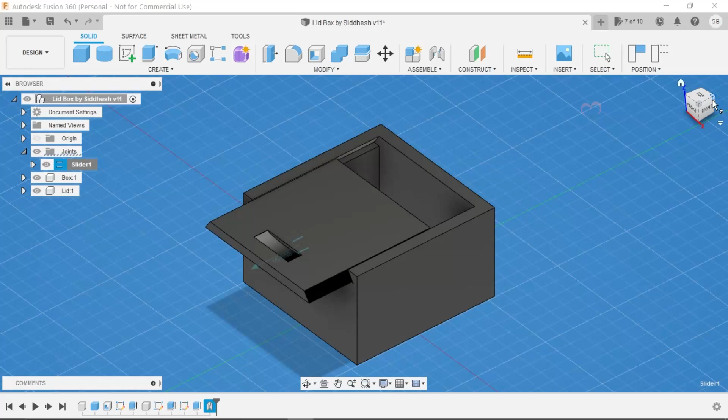Let's take a glance at the way to produce this 3D printable box with the sliding lid.

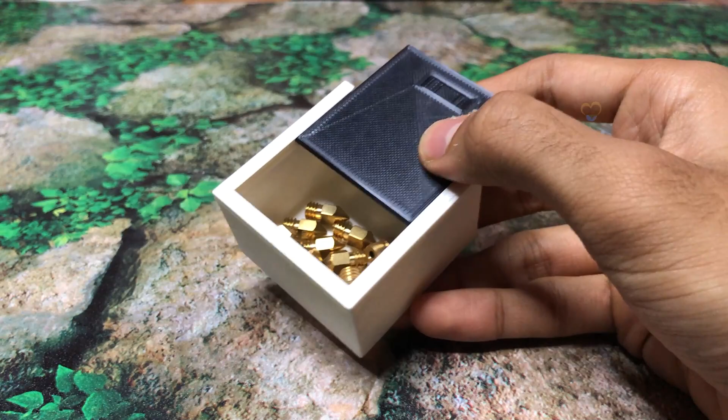In this episode, I will show you how to design a 3D printable box in Fusion 360. This box with a simple sliding lid will serve as the perfect storage container for a variety of objects with user parameters. You can simply change the size to suit a deck of cards, SD cards, and store any objects you want.

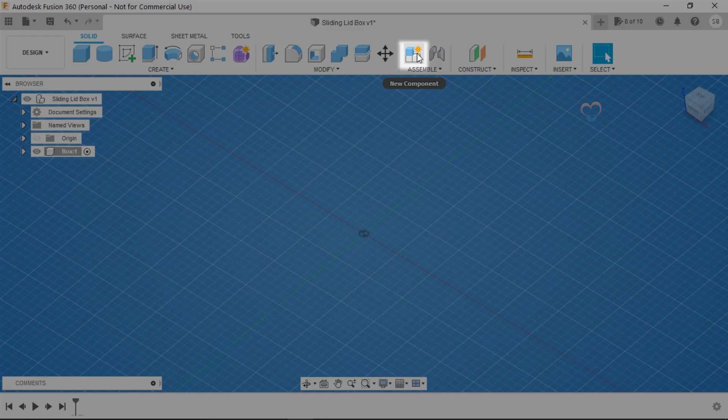To create the box, make sure the Design tab is enabled. Click on New Component and name it Box. Again click on New Component and name it Lid. Now look closely - the box component is selected as a parent category. Make sure to close this and select your project name as the main or parent category. Now make sure to select the box component.

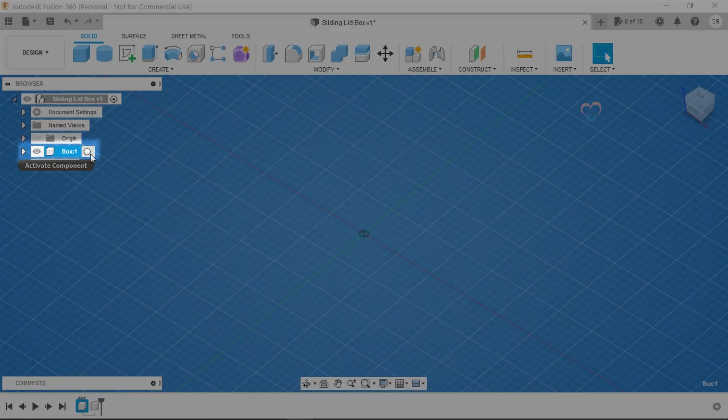Click on the box command and start sketching on the XY origin. Press tab and make a length of 50 mm, width 50 mm, and height 50 mm, then click OK.

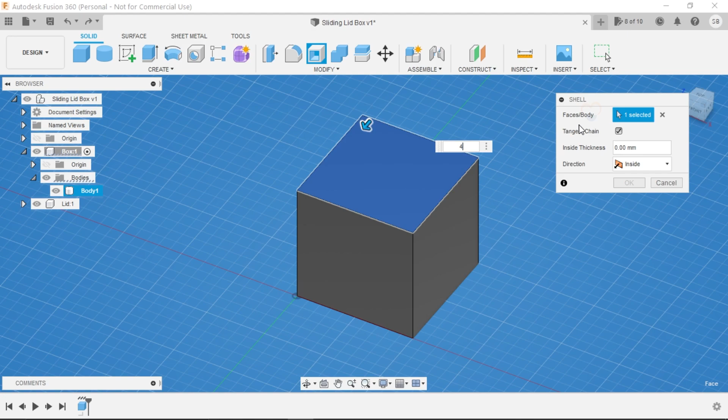To make the box hollow, click on the upper face of the box and click on the Shell command from the panel. Then make the thickness 4 mm and click OK. The wall thickness of the hollow box is 4 mm from all sides.

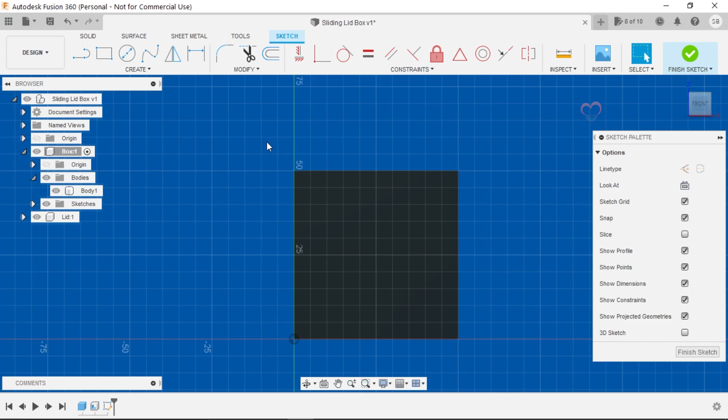Now right click on the front face of the box and click Create Sketch. We have to project the outer edges. For that, click on Create, and in the drop down list find Project or Include. Select Project, click on the front face of the box, and click OK.

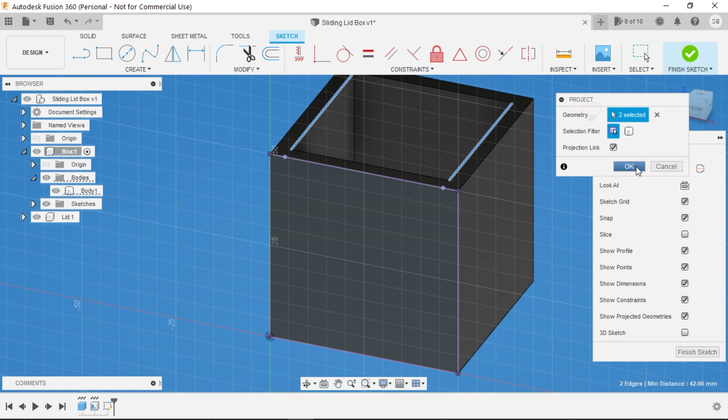Right click on the screen and again click Repeat Project. Now select the inner two edges as shown in the video and click OK. Now you can see all points are visible.

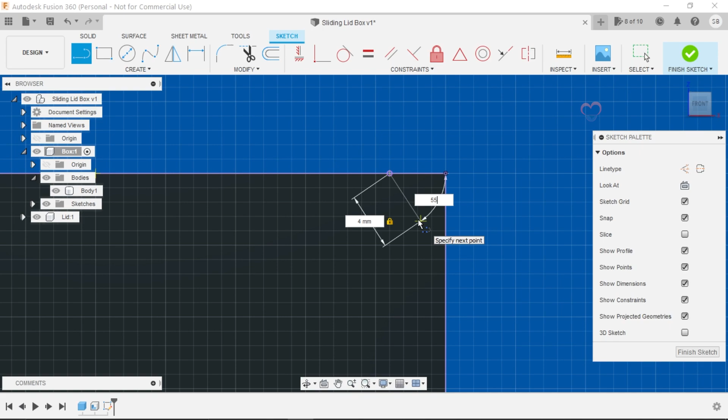Click on the Line command from the panel. Select that point and drag the line 4 mm, press tab and type 55 degrees. The line is now matching the point.

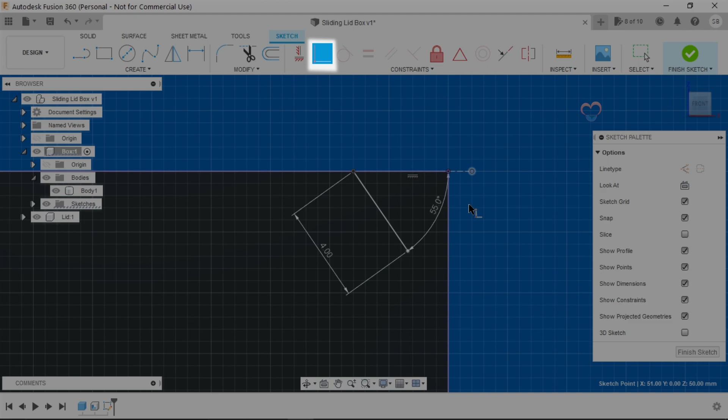You'll notice we have a point in the upper right that is not constrained, caused by our angle dimension. We can select the point and the corner, then add a coincident constraint to take care of this. Now let's click on the line tool to produce a line running directly down the center.

As you can see, the triangle appears in the center. Now click and drag down, then click Escape to clear all commands.

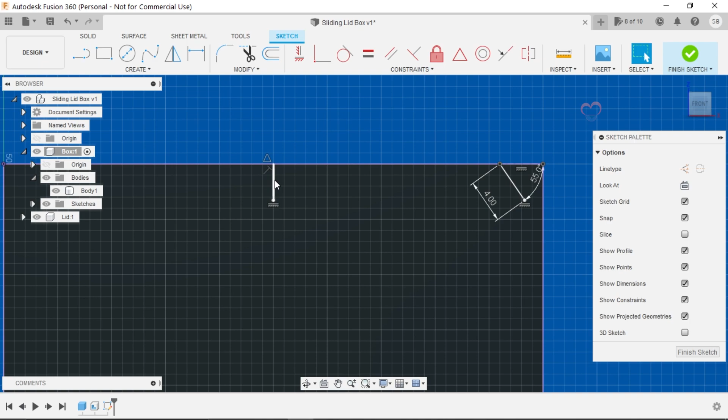Select these 2 points and click on Horizontal Constraint command so it will remain at the same height. Select the middle line and turn it into a construction line. Now click the line tool again and connect these 2 points.

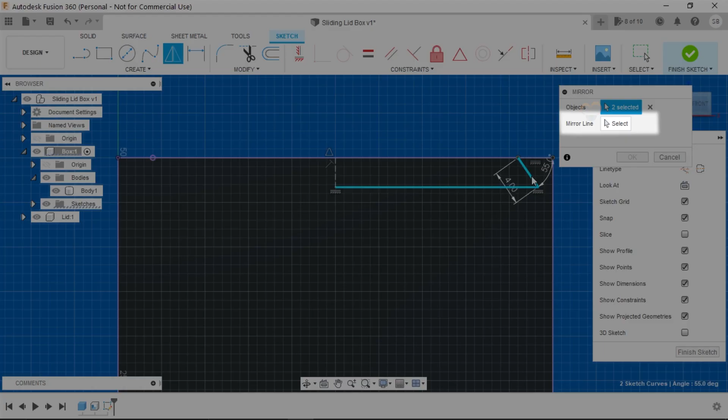Click on the Mirror command from the panel. We select these 2 lines as the object to mirror, and for the mirror line we choose our construction line, then click OK.

Click on Finish Sketch. To cut away this slot, we can use the Extrude command. Select that part and click on the Extrude command.

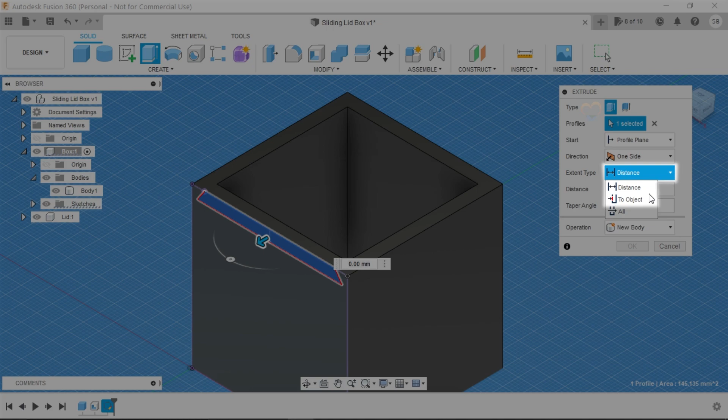Select the To Object option. Now select the rear face of the box and hit OK. You'll see that we have a nice ridge for the lid to rest on.

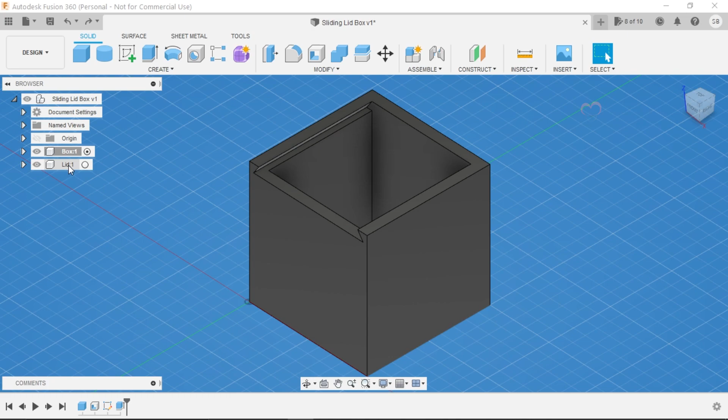Now we are ready to make the sliding lid for the box. For that, select the lid component. Right click on the front face of the box and click Create Sketch.

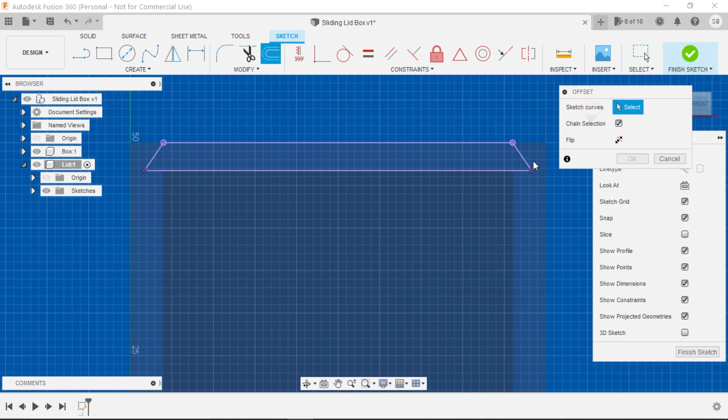Now activate the Project command and select these 4 edges, then click OK. Select the Offset command from the panel and select these 5 edges as shown in the video, making the offset position 0.25 mm, and click OK.

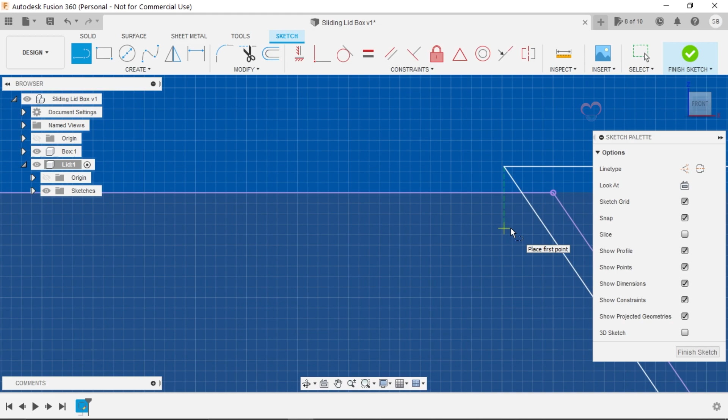I found that worked well for my printer. Select the line tool and click on the inner line that is offset, then drag to the other point. Click and join the point as shown in the video.

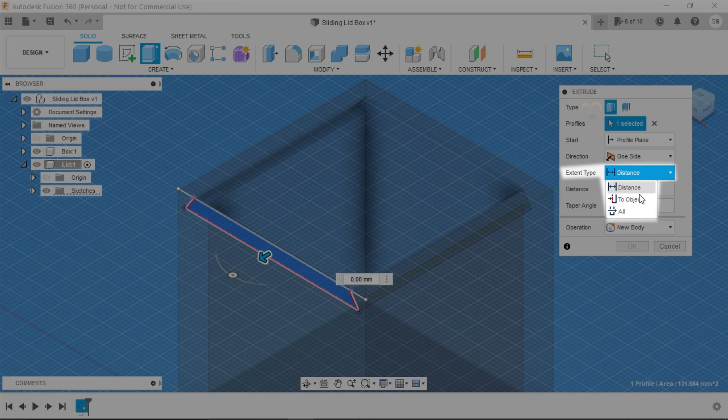Click on Finish Sketch. Now select this part and click on the Extrude command. Make the Extent type To Object, then select Rear Wall. Change the offset value to 0.25 mm and click OK.

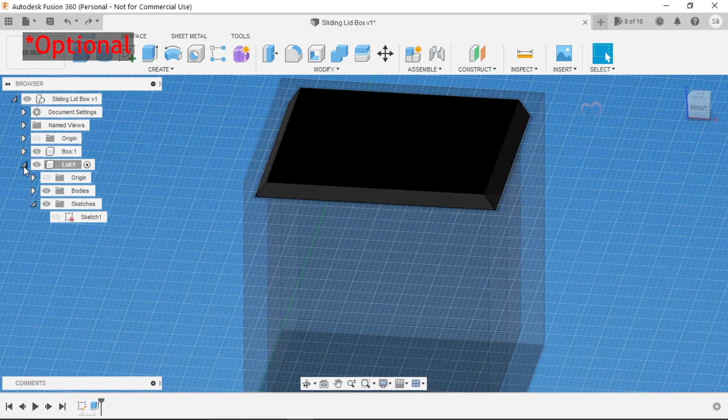If you wish to change the offset value according to your printer, right click on the sketch and select Edit Sketch. You'll see these small offset icons - double click on that and change the offset value according to your requirements.

Now right click on the front face of the lid and select Create Sketch. We need to create the rectangle. For that, click on Create Rectangle option, then select Center Rectangle.

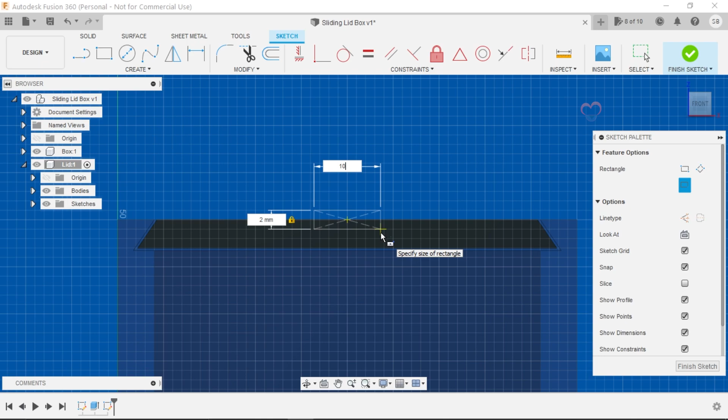Click on the center point of the lid and drag that point to create a rectangle with a length of 10 mm and height of 2 mm. Finish sketch - we need to extrude this rectangle.

For that, select the upper part of the rectangle and click on Extrude command, Profile Plane, and select Offset. Make the offset value -10 mm and distance 5 mm, then click OK.

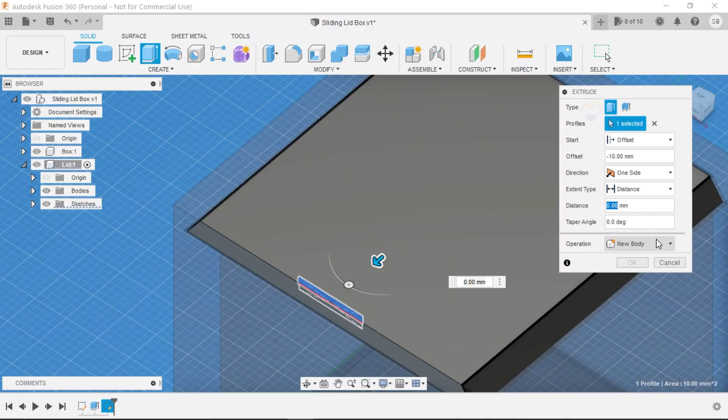You can see the handle is uplifted. As we selected the upper part of the rectangle, you can also select the lower part, which will make a gap handle for your sliding lid.

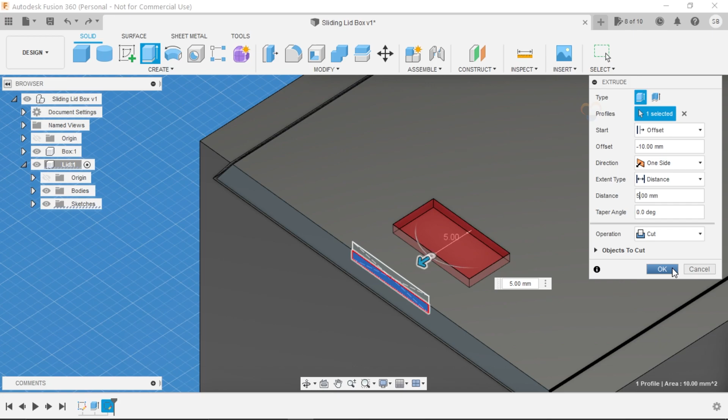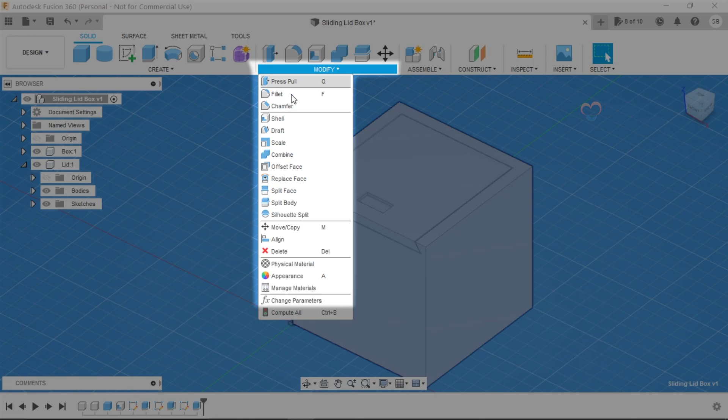Now our box with a sliding lid is ready. Most importantly, if you wish to change the size of the box in future prints, you have to do some settings in parameters. For that, select the entire project, go to the Modify drop down list, and click Change Parameters. In Model Parameters, you can see all the size values of your project.

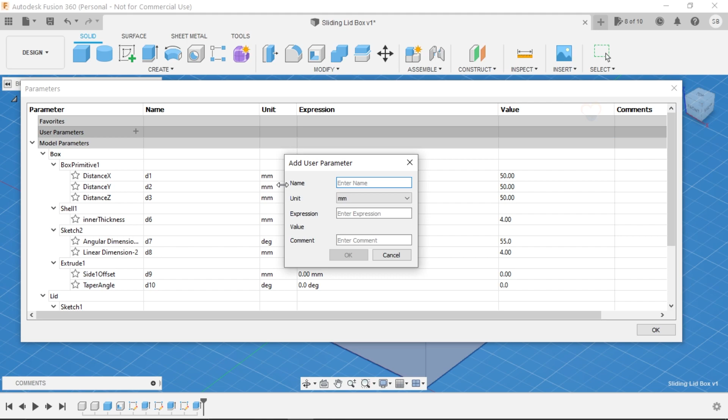Let's create new parameters. Click on the User Parameters plus icon and name it Length with Expression 50. Follow the same process and create Width and Height. Also create Thickness with Expression 4 mm, then create Clearance and make it 0.25 mm.

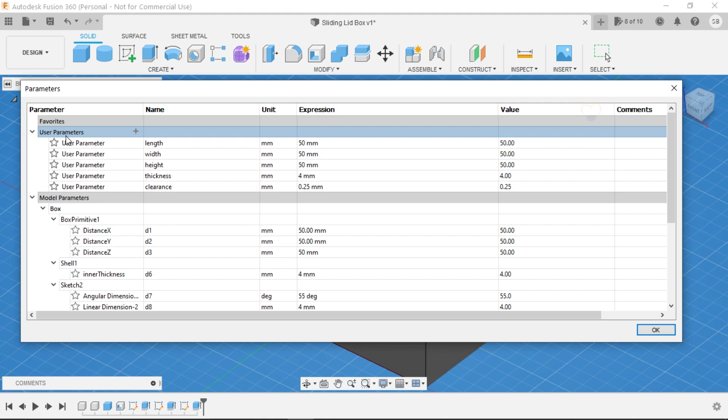Now let's point these user parameters to the model. In the box, point distance x expression to Length, distance y expression to Width, and distance z expression to Height. Also change the other values as shown in the video.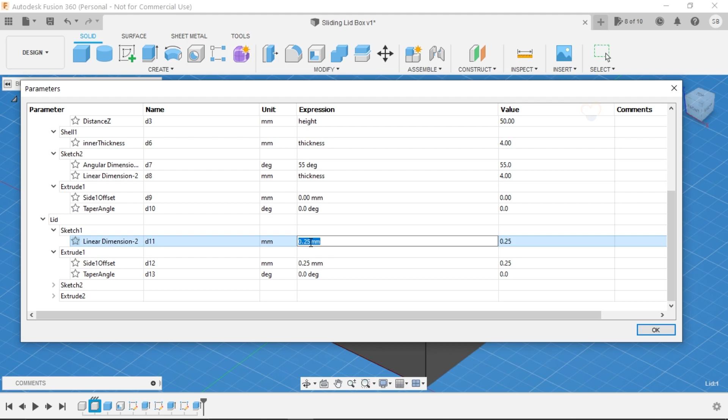After changing, let's test the values. As you can see, you can change the box dimensions as per your requirements at any time.

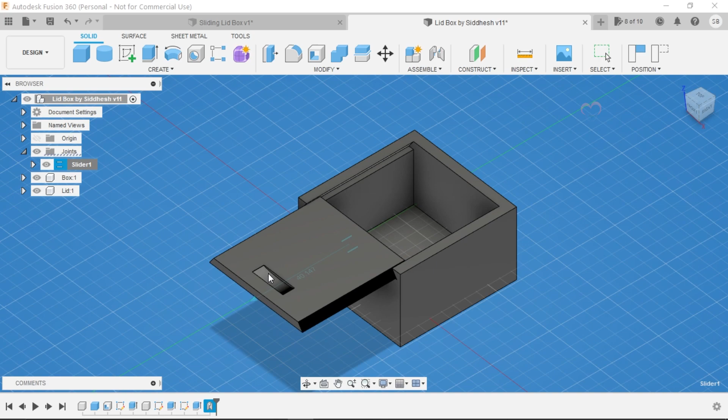Now select the box component again, right click and save as STL. Then select the lid component, right click and save as STL. Now you are ready to print.